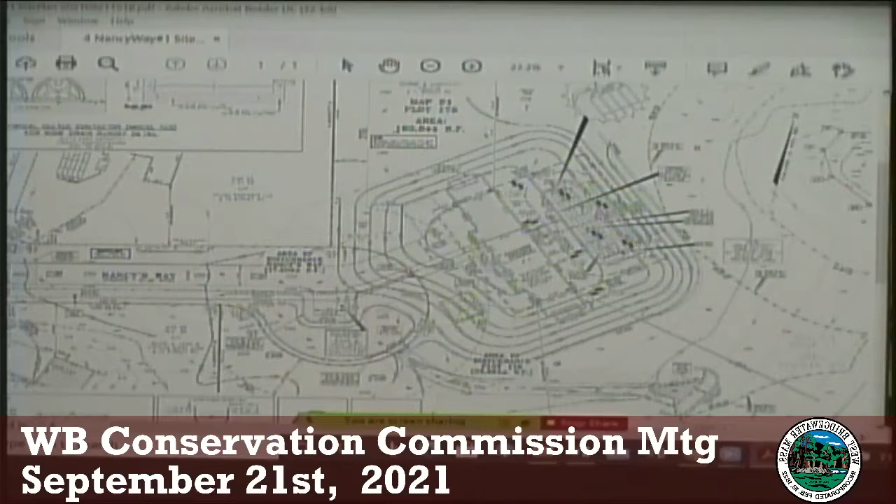Where you see the disturbance area there, we've already installed silt fence on the ground as shown on this plan. This basically marks where the limits of construction is going to be. So all the disturbance will be inside of that silt fence area. Down at the takeoff swale, you see that we've got some silt sock installed at the end of that takeoff.

That hasn't been installed just yet. They started to trim out a little bit just to get in there to do it. One of the neighbors asked what they were doing, and I had told them that if anybody had any issues, just to stop what they were doing. But basically what they did, they just cut one tree down, probably halfway, just where the wood started, but they left it there. They were just trying to get access to put the silt sock down around that area that we wanted to continue to clean out. That was last week, but the meeting was coming this week.

Other than that, they're ready to go. They're a young couple that just bought the house, and they've got all their ducks in a row, so to speak, and they're anxious to get going. They love the area. It's a beautiful area.

Bill, can you describe what you're doing to mitigate the impervious area for the roof? Yeah, we've got on each end of the house, you'll see that we have the roof recharge systems, so everything coming off the roof area, both there is a 3-car garage on the northerly end of it, and recharges off to the north of that. Same thing down the south end of the house. They'll be installed there, recharged accordingly, keeping them away from the septic system as well.

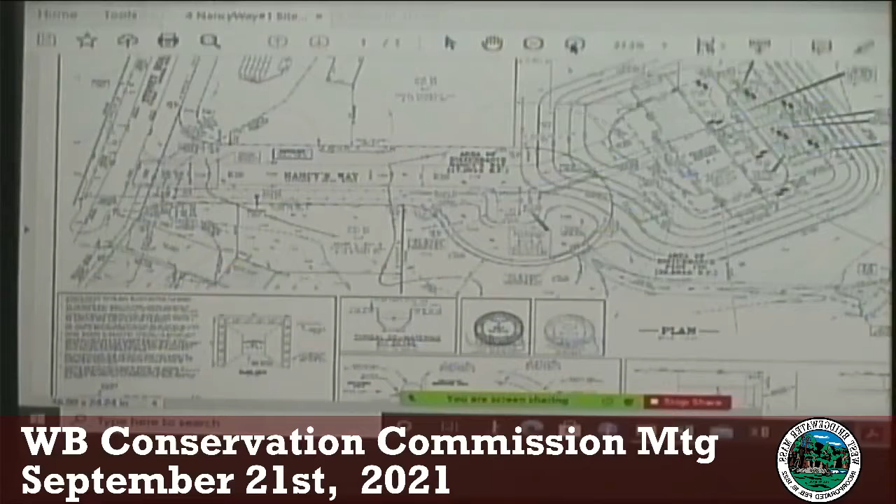John, did you have anything? That's an area that will really be pretty much a grass area when it's finished, but it's more accessibility right there. Again, everything has been cleared. It's an open field, so other than some of the activity at the entrance where the two houses are, what they have done on the ground now - I was just out there this morning - they've had some stone put down at the entrance. They've got it marked out, and they had a load of stone delivered that'll be installed at the construction entrance. The 50 by 24-foot area.

Sir, I have a question as a newbie on the committee. Do you have to get permission to cut trees before you cut?

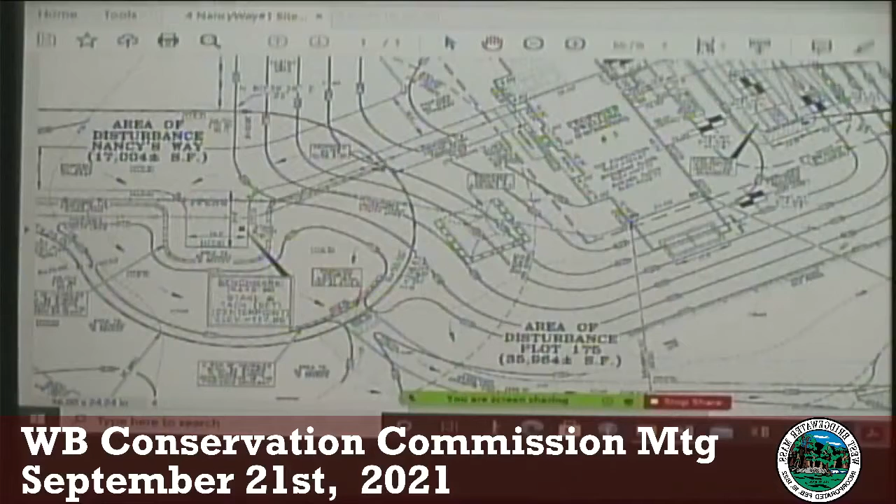Well, I'm not sure, it was only one tree. It was really in the process of just trying to get the erosion control set, is what it was at. It's actually in the middle of that grass swale. So that was the reason they were trying to cut the swale out, just to get access for the vehicle to come in and unload and install it there. But it would have had to come anyway because it's right in the middle of what will be the constructed takeoff strip. Everything we're doing was certainly outside the buffer, but they were just anxious to get in there and get the silt sock installed.

Do you want me to address that? Yeah, so I can expand upon that a little bit, Carol. They're outside the 100-foot buffer of the wetlands, so there isn't a restriction on cutting trees outside the 100-foot buffer. They would be subject to our approval for anything within 100 feet, and they can't cut anything within 50 feet. If they do, there's penalties and a severe increase in the planting ratio to replace the trees that are cut down. Thank you. You're welcome.

Any questions, John? I do. So I don't have any issue with the actual plan. As I noted, everything is outside the 100-foot buffer, so we have no means of putting in conservation posts or anything under the stormwater portion of the bylaw. So we're going to have to monitor this type of site to make sure future owners do not encroach upon the 100-foot buffer without seeking information from us, and definitely not within 50 feet of the wetland. So if they were filing under the wetland bylaw, we could ask to have the conservation markers put on this 50-foot buffer no-touch zone.

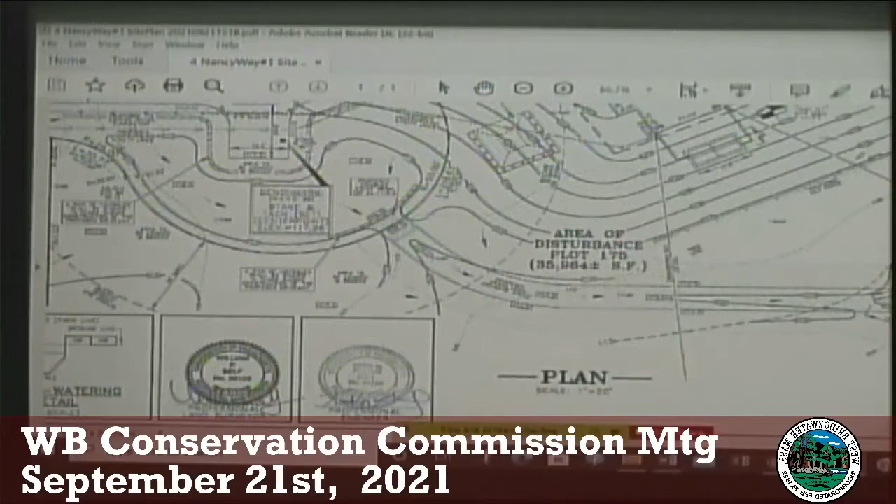So we're going to put the requirement that your future owners, current owner and future owners if they're not the same, will have to maintain this stormwater basin and submit yearly reports to the commission as the stormwater authority that they've done the proper maintenance required to keep this operational as designed. That way we can hope to prevent any future impacts on the 100-foot buffer and eventually the wetland as it goes through the buffer.

Other than that, I don't have any other points to bring up, Mr. Chairman. Anybody? The septic system out back, how high is that gonna be raised above existing grade? Did you hear that, Bill? I just got the very first part of it. Okay, so the question is, how high is the septic system raised above the existing grade?

Yeah, if you look close, at the scale you've got there, John, you can see the septic system area is about elevation 121.5 above sea level. The solid lines with numbers are our proposed grades. If you look underneath, the dashed lines with numbers are about 117, somewhere between 117 and 118. So there's going to be about 4.5 feet of fill, by it all said and done.

Most of the reason for that is the water table, and keeping the foundation floor for the basement up high enough, as well as the septic system, 4 feet above that water table to the bottom. That's the reason for that particular area.

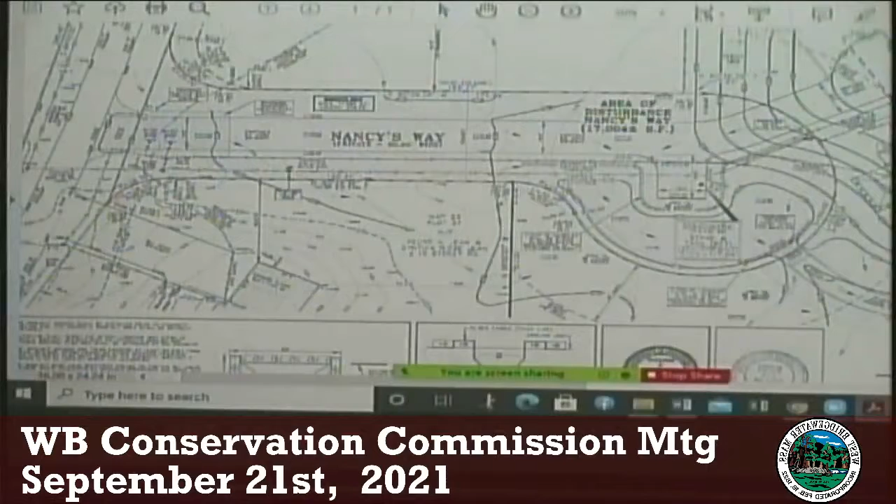Because there are no storm drains in this area on Stoney, we talked about that. I'm looking at number 15, to the south — this one right here? Yeah, more to the back of their property. I know the elevation is up there, but it runs this way, toward the back of the land. So are we going to get any runoff off the driveway into the yard of the new one, number 15? Right in there. Did you hear that, Bill?

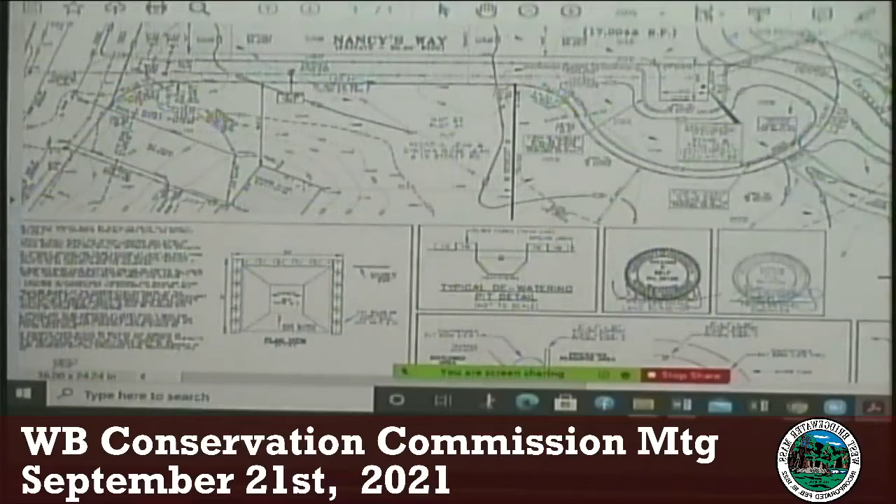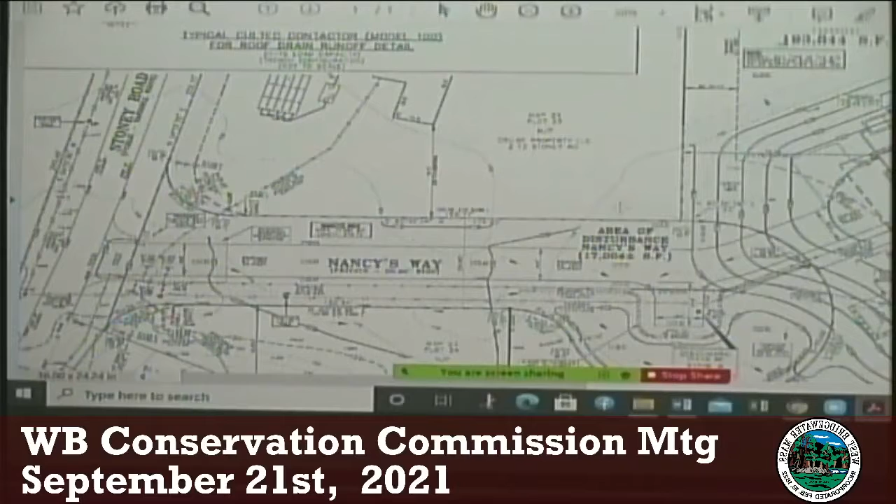Yeah, I can answer that, John. This was originally designed when we did the front lots — we had a design for the back lot as well. You can see by the contours that the intention for the whole back of 15, as well as the back of number 13, had always been that it's directed to flow down towards the low area in the driveway for number one, finding its way into that small retention/detention area down there, just off the kickback in the driveway. So it's all designed — if you see the contours, the very southeast corner of number 13 has an elevation of 117.7, with a 118 contour just above that.

So all of that backyard area will continually flow back, but eventually that one corner will funnel through — that's where they want to run off water. Nothing from the driveways is going to be added to this particular area. Both driveways on both houses are graded from the garages, which are street-load garages, back out to the street itself.

Is that a little berm I can see along the edge of that driveway? Is that going to direct water down to the area where the swale is going to be? It's not so much — it's going to be a very slight berm, only 2 or 3 inches high. It's just enough, right along the edge of the pavement at the entrance of the driveway, so that the stormwater coming off of Stoney Road will not be allowed to come down into that basin area.

So that was always the intention. When we first got in there to do the original survey, there was actually an old low wall that ran down along, probably 10 feet off that paved area. It wasn't really that definitive, but it was enough of a buildup that the water would stay on the Stoney Road side. We're not changing the existing conditions for that reason, but we just didn't want this to be a catch-all for the town water.

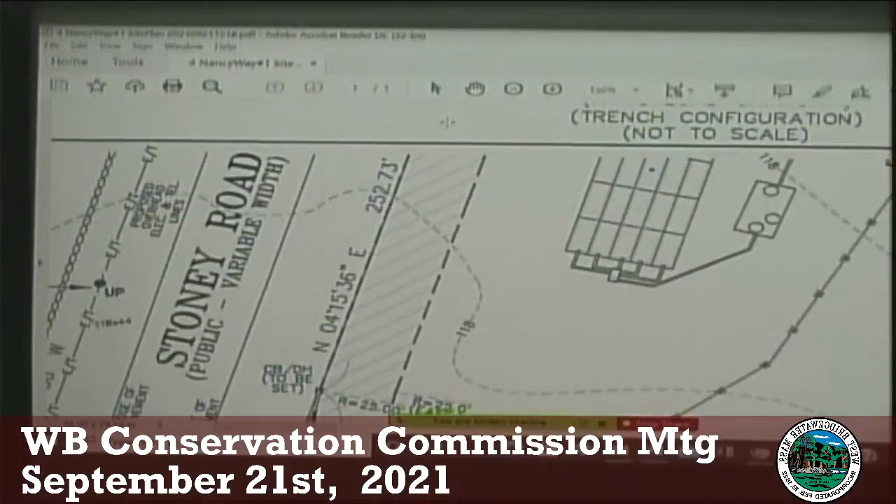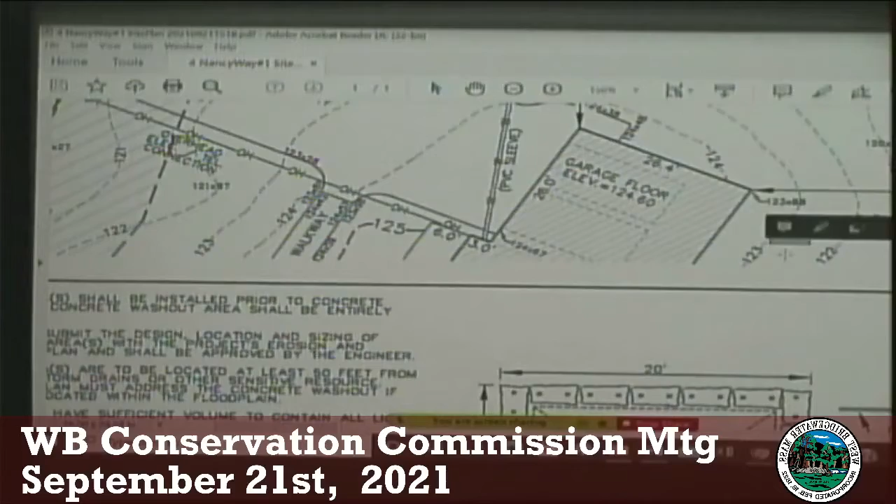But number 13 is going in the opposite direction, going north, let's say, and number 15 is going southerly towards Mill Pond. Then we have at the side of the house, elevations down towards Nancy Way, and in the back, elevations going towards the back of the lot, the lot that's now 1 Nancy Way.

Yeah, and if you can slide that forward, John, you'll see, just get up behind number 15, you can see the proposed contour in there. They've been graded such that, and this was the proposed, but you'll see that we're going to be shaping that up. It was always intended, that's the natural flow.

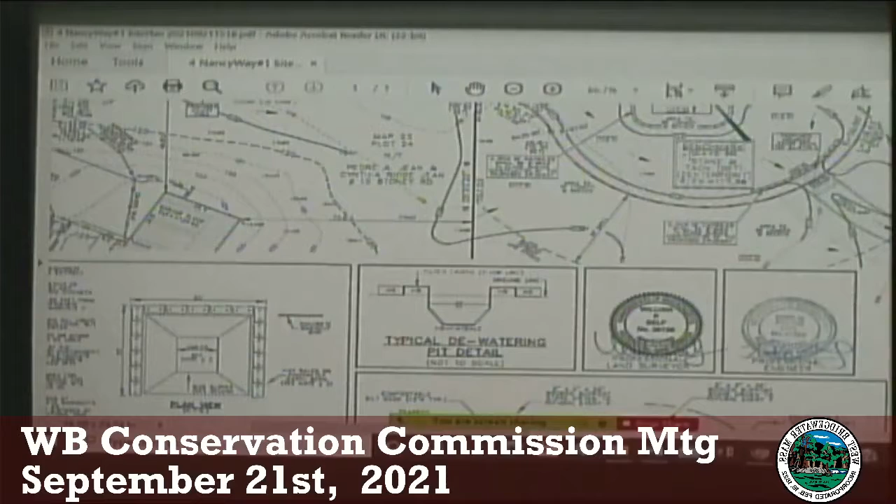It's just that rather than just going straight by, we've shown that we're going to take it in and put it into that little detention area coming off that house number 15, and again just run it into that small detention area, and then it'll be put in that takeoff channel. So it more or less puts it in that one spot.

And that detention area is big enough to hold both those 13 and 15 lots? Yeah, well, yeah, it's basically just a driveway, and these are the plans that were submitted for the planning board under their review under single-family lots, and that's what we've always proposed.

So it's big enough? It's big enough to hold it? Yeah, on small storms, sure. Okay.

John, I have a question. If you could scroll back to number 15 Stoney Road. Yep, and just go up a little bit. It looks like the 118 elevation is a new elevation. Yes. Is the abutter okay with the elevation change on their property for the project?

What will end up happening on that, we'll just pull that back over, we'll just adjust it onto our property. We've staked out all the property lines down on there, so the construction will be outside of that line. How about this one over here, Bill?

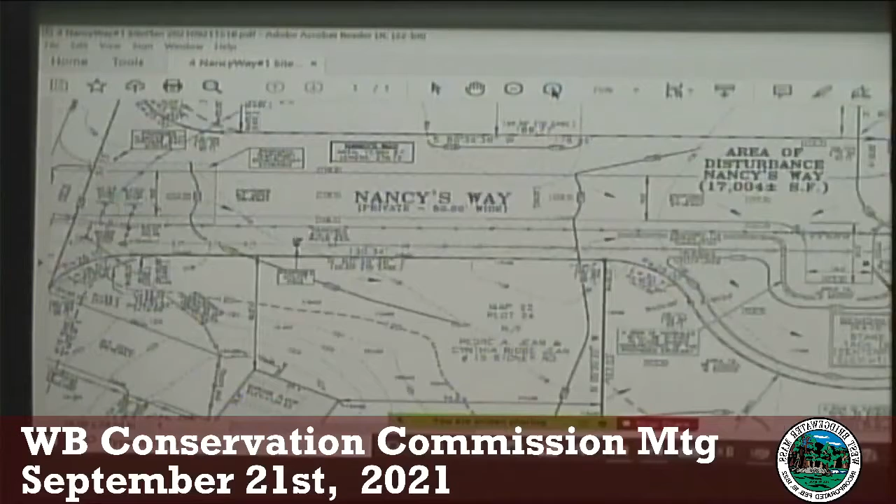Okay, I see, yeah, there you go, it's right there. I understand. Yeah, as long as we get that flow moving down towards the detention area.

How big and deep is that detention area? If you scroll back up a little, you can see it's only going to be probably 1.5 to 2 feet. It'll just appear to be lawn, a bowl area really meant to redirect the water. It all goes in that same direction now. Under the single-family home, we're not changing the amount of water, we're just making sure it continues to go back in the same direction it did as a result of the two front lots. It's the same amount of water, if not less.

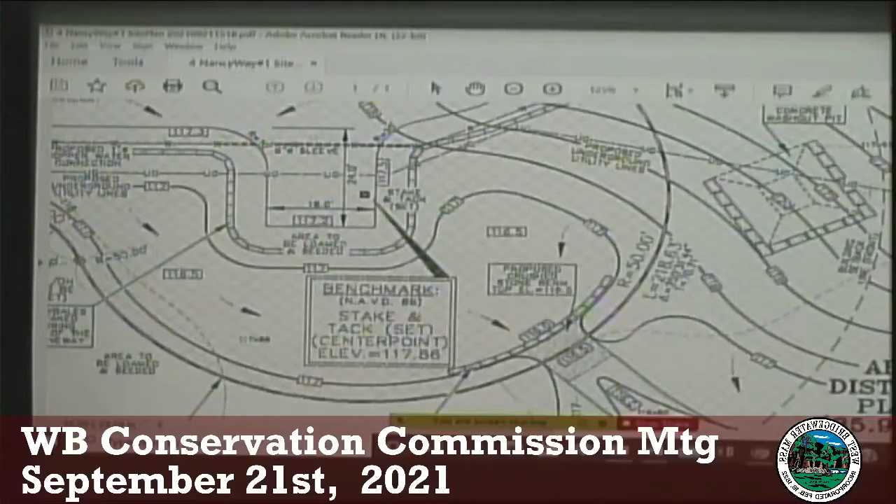Half the front lots will be going back out to the street under the design for the former properties. All right, any other questions? All right, I'll open it up to questions from the audience.

Anybody have any? Yes, I'd like to ask a couple of questions. Is anything in this plan looking for a variance or an exception, or is this a legal lot? He's outside the 100-foot buffer, so there's no wetland regulation we look at. We have our general stormwater bylaw that covers this disturbed area if it's over certain thresholds for square footage.

And then we have to look at where the drainage is going. That's one of the reasons we're looking at how high this lot's built up, because we're seeing a lot of what we'll call islands built in town recently, and all that drainage is now going somewhere, typically onto a neighbor's property. So we're trying to make sure that if this is draining away from the house, it's not draining onto somebody else's property, and if it's going in that direction, it's going in the natural flow, and we're slowing it down and treating it before it gets there.

We were here a few years ago when the first two lots were proposed, and we were told not to worry, all the water would be taken care of. Now, the gentleman's correct about Stoney Road. Right about where Nancy Way comes out is the high point, so if you have any rainstorm, there's a permanent puddle in front of 13. The contractors come in and put 18 inches of 2-inch rock there to kind of hide the puddle, but the puddle's there constantly. The rest of the water comes down Stoney Road, goes south, and is constantly eroding my property line, or the street near my property line, and it washes that material into the low area near the corner of Stoney and Mill Pond. So there's nothing being done with this water.

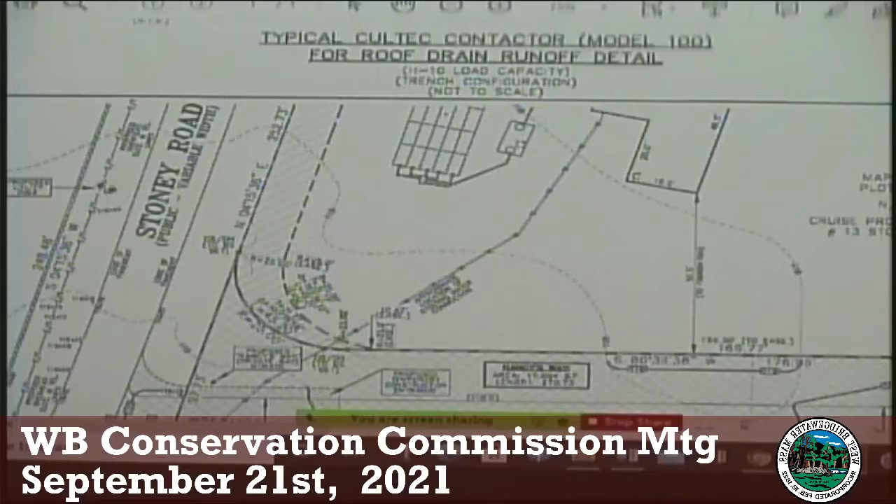If you can just lower this plan again, the other plan. On the site plan for number 13, John, I can send it over to you.

That proposed utility pole is in the wrong place. The utility poles are actually east of Stoney, not west of Stoney. Say again? The proposed utility pole that's right there? Yeah, the utility poles are east of Stoney, not west of Stoney.

Yeah, I understand that, but I was just trying to get you to a position. You see where the Stoney Road, the letter R is, the 118 contour? I'm estimating probably another 25 feet, John, is the low point in the road, the Stoney Road, going both north and south.

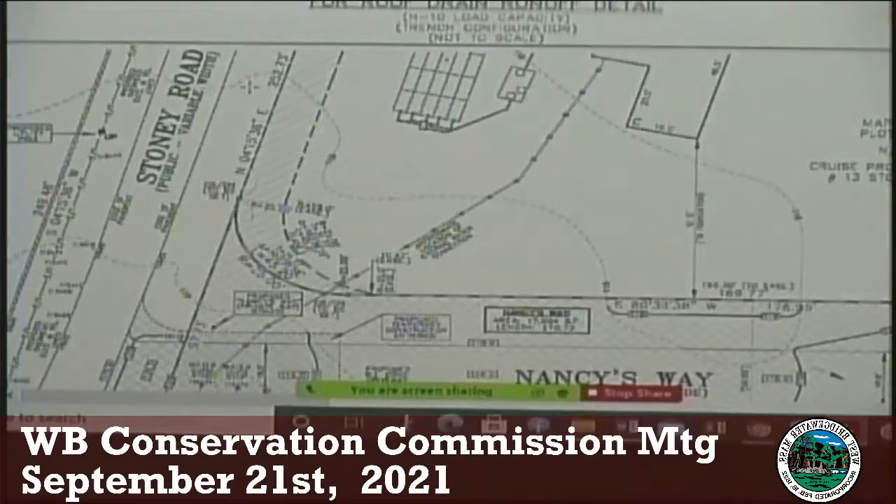The trench that was put in when that 3-inch, 4-inch rainstorm came, unfortunately at the time they were also final loaming that lot 13, and it was just a washout. One of the drains for the roof wasn't plugged in like it was supposed to, but that was done. That issue was resolved.

But most importantly, we did have a flooding issue. We had the town DPW with the general contractor that was building number 13. He was contacted by the DPW. The contractor that Dave Cruise Properties was using at the time came down and they went over the issues with the DPW. What had happened was...

Traditionally at that low point, if you go towards the west onto the state property, you'll see the road drops down maybe 1.5 feet or so on that other side. It does create a kind of swale there. It looks like over the years, through the plowing mechanism, probably in the wintertime, the berm on the other side of Stoney Road, the loam, looked like it was chewed up over the years by snowplows.

When it redistributed, it just built up a berm. That water always should have drained off that side at that low point. It's probably about an inch and a half higher than the center line on both sides.

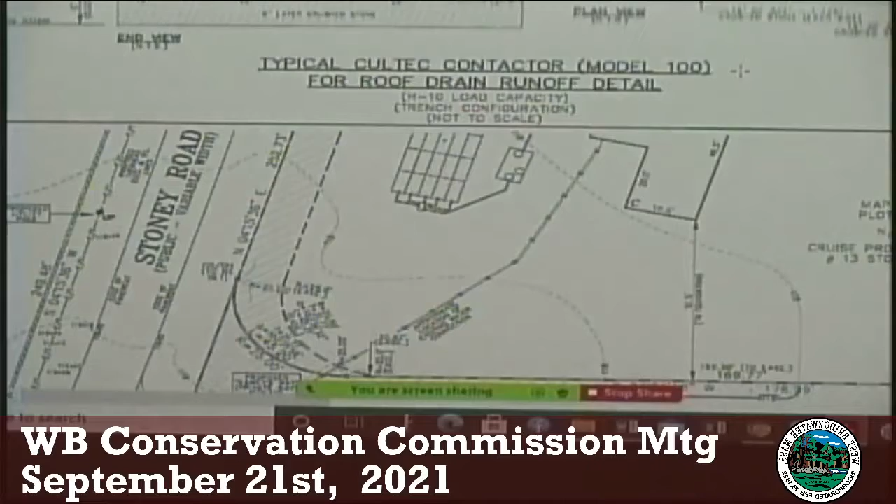So we had done a lot to try to help a problem. That problem has been there. I think the residents have told you it has been there a long time. It's just a low spot.

I took additional grades, and it doesn't take but more than about an inch of height in the center line at that low point to keep the water from naturally going to the west off that roadway, and that was happening right there. But as far as ensuring that, going back to the entrance of the road, John...

As far as ensuring that it's built, the as-built will show. I pointed out to the contractors that were brought in to build the house exactly what was to be done, supervising and making sure, through the as-built process, that it's done correctly.

But as far as the one item, we can certainly stake that out and redirect, just turn the swale over a little bit more, going towards that neck where the 100-foot buffer comes in. Right now we've got it outfalling at, I can't read the number, John. If you raised it up, see what the outfall of the swale is, I think it was just at one outfall.

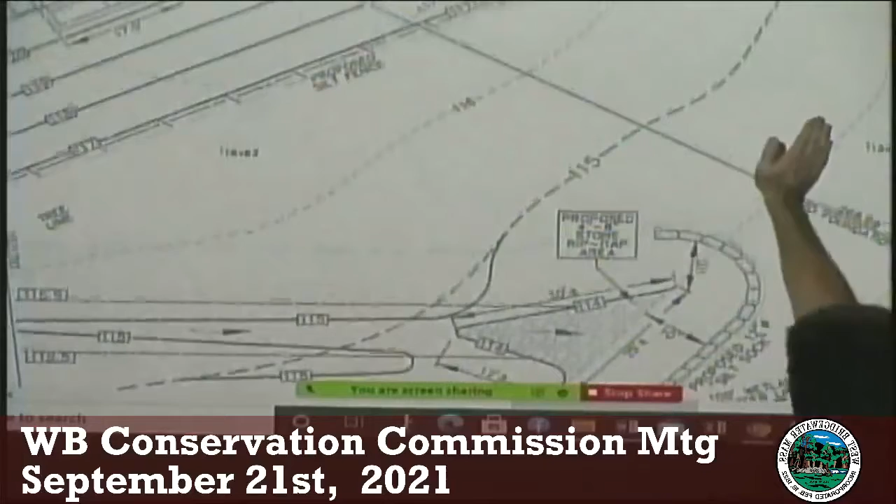So if you scroll back a little bit, John, north and east, scroll down just a little. So this would be moving probably up and then that way, to make the directional flow work better. Because if anyone ever walked back there with me, that's where there's a lot of heavy, heavy trees, and that's the only thing that kind of sucks up some of our water right now. That's all that's left, there's beautiful pines back there, just huge, right where that huge map is probably.

Is that the natural, where the house is being built, I don't want to belabor the whole thing because it's not our purview, I don't think, but where the house is being built, is that the natural contour of the land, or are they bringing fill? Well, they're raising it up, which is gonna increase the amount of flow coming off. That's correct. So you've gotta compensate, even though they're not theoretically shedding more water somewhere, the flow is faster because of the elevation.

But they have the detention areas, holding it back in the detention pond a little bit. They've also got the rain infiltrators to take all the stormwater off the roof. But you've still got all the driveway impervious surface to deal with, and that's what you gotta slow down, and the lawn is up that much higher, so you've gotta figure out how not to shed that. So most of the runoff, for this new house project, comes from the roof.

So they've put them into dry well systems. And the driveway, if you drive down any one of the streets in these newer subdivisions where everything's raised, the water just pours down the driveway and into the street system. So they've addressed that by putting it into that basin. But even if it's like this now, and then now it's like that, you're still gonna get more runoff than you would. And it doesn't help that it's all clay.

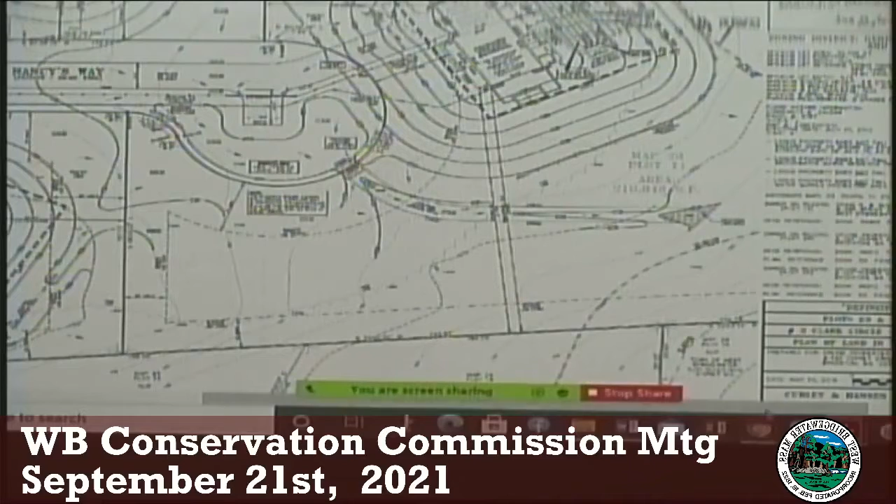So basically, they're gonna be moving, he's gonna raise the swale line, right, and then come in. Yeah, so it's gonna go up here. It looks pretty far, but it's really not many feet at all off our property line. There's just so many trees in there, and there just happen to be the really big ones. He got one cut down, and I stopped him, and I said, before we have this meeting, I don't wanna lose the trees. And then we changed it, exactly.

Right, because we changed it now, and he's gonna move the swale up, and that would have saved the tree that he cut down. That'll create a larger buffer.

It doesn't give the neighbors a good feel when the contractor goes and tries to do something before a meeting. Yeah, exactly. It's always easier to clear cut everything and have a clean slate than to work around trees. That's what we faced, it's tragic. But I work from home, so.

So hopefully we'll have a set of new plans for everybody to look at by next time, and we'll address most of the concerns. And the markers will be out there.

All right, I think we've got a plan to proceed anyway. All right, so we're good till the next meeting. Is anybody gonna be driving out there to look at the water, or no?

That would be a good time, just to have our word for it. Department of Public Works will be there Friday morning, after it rains, take a look after the rains come. We don't even need much. If I can get out there at night, I will. Thank you.

And feel free anytime, if you see things like that, take a picture and send it to me. Because I don't work on Fridays, and I'm not here Saturday and Sunday, but if you see things, take a picture, email it to me, and I can jump right on it.